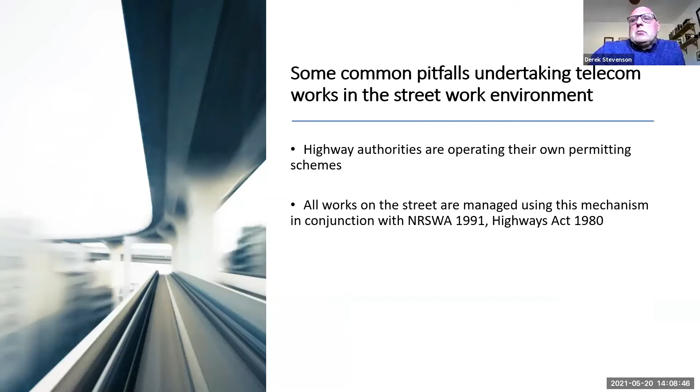Also contained in the Act is a provision for local highways agencies or local authorities to issue fixed penalty notices for failure to address issues contained within permits that are issued when doing works within the Streetworks environment. These are some examples of what an FPN notice looks like, and what they will issue them out to you for through the portal.

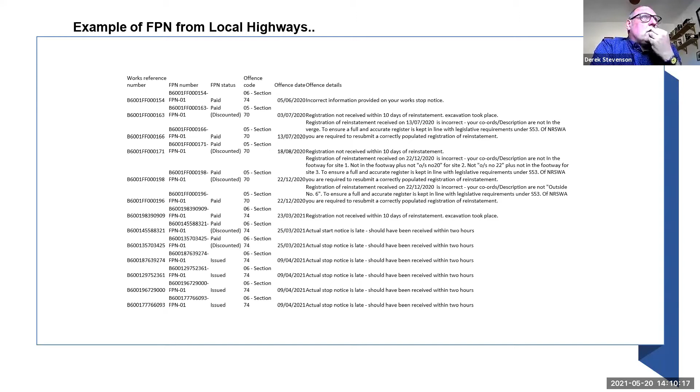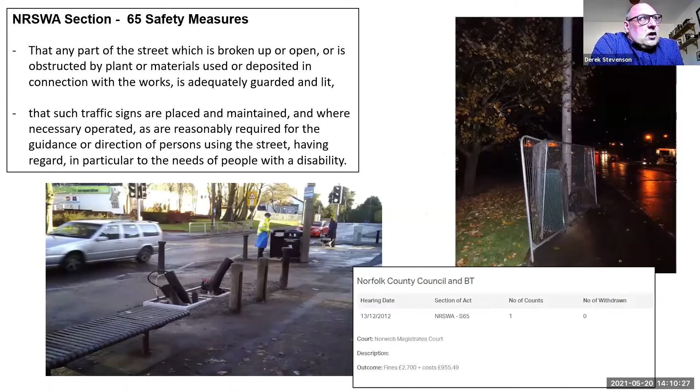The interesting thing about this is, under NRSWA, there's section 65, which they call safety measures. The two photos I show here were actually taken while we were doing live works delivering some telecom works. The first one, on the left hand side, shows a street cabinet that's going to be deployed at a later date. That would actually result in a section 65 notice and potential prosecution. That is an unsafe piece of apparatus that's been left, and it's creating a hazard towards the general public.

What you need to be thinking about when doing these works is if somebody who's impaired of sight was to come into contact with that piece of apparatus and suffer an injury, you would be liable not only under section 65 but also under liability issues as well. This is why local authorities, especially the highways agency and highways inspectors, get rather upset when they go out and check on permits and see situations like this occur.

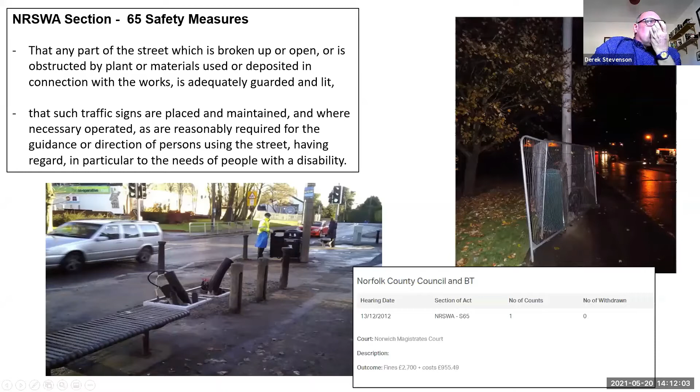The next common occurrence is unqualified staff working within the Streetworks. There is a provision within the legislation that says folk need to be qualified, and it details what that qualification is. As a minimum, most folk need a Unit 2, which is what they call a sign, lighting, and guarding piece. It details how to set up a set of traffic lights, but those within the industry potentially think it's not fit for purpose because we don't set up traffic lights all the time. However, what we do is set up streetworks, which will potentially be permitted and incur some type of footway closure and/or carriageway incursion.

Section 70 is also an interesting piece because it's what they call a duty to reinstate, but it goes further than that. Essentially, the local authority can issue a fixed penalty notice when your permit description isn't accurate enough. For example, saying works are in the verge when they're actually in the carriageway, or saying works are outside number 6 when they're actually at number 8 or 10. So you need to ensure your permit description is an actual reflection of where you're working.

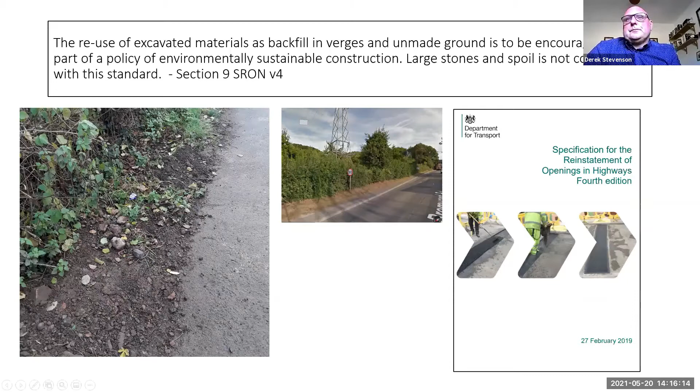Section 74 is the big one. Essentially, you have a permit for a period of time, and then you overstay that time period. The local authority will check whether you've overstayed, meaning your street works are still continuing after the permit date, or there's paraphernalia left—you've packed away and collapsed your site, but they will deem it as an occupation of the highway and an extension. This is where the fining system becomes astronomical.

There have been Section 74 fixed penalty notices of well over 60, 70, even £100,000 placed on civil utilities because signage was left on site at the location and folk simply forgot about it. So just be aware of that.

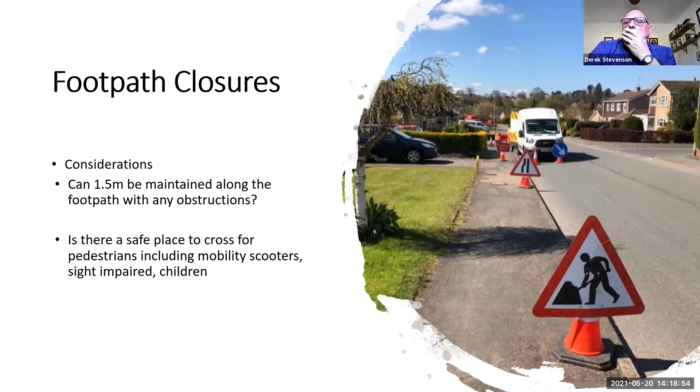Here's an example of site setup: a site was set up with the footpath closed off, expecting pedestrians to walk around, but there was an incident where a mobility scooter went onto the grass verge and toppled over. Consideration needs to be given to ensuring sufficient hoarding is put down to prevent a mobility scooter from toppling or presenting other hazards, like people tripping over. It may be better to consider moving the footpath over or completely covering this area instead.

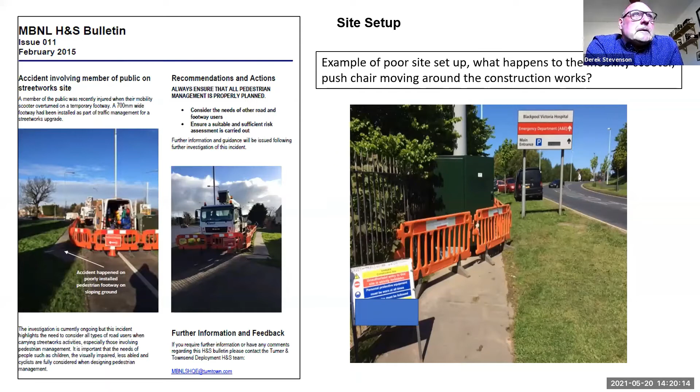Gate guarding. There's been some issues around this recently. Telecom operators had an unfortunate incident whereby a toddler entered a partially guarded chamber, and the toddler fell in. The actual operatives were at the next chamber, looking at how to essentially do the works they were planned to do.

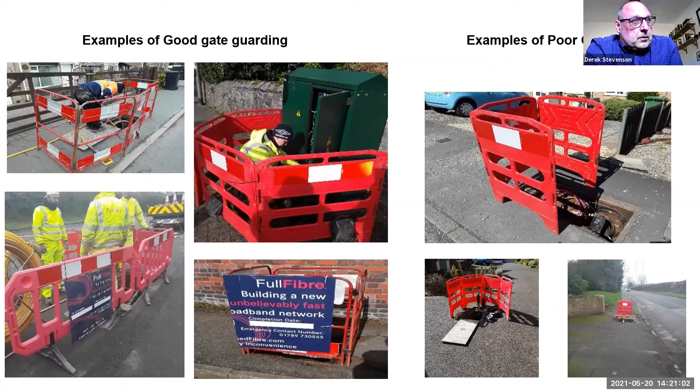This is probably a pretty easy win, in the sense that when guys are out working, the supervision piece is that they are actually leaving unattended chambers fully guarded. There's some good examples of gate guarding, and some pretty poor ones as well that I've clocked when I've been out and about on our estate.

Defects on existing telecom infrastructure - this is where yourselves can potentially report these in as an immediate defect. So this is one that was recorded: the chamber lids are going to essentially fail if one more of those pins break or fracture.

This was reported into the asset owner, and they've got a 2-hour SLA to respond, in which they did. We do need to have a facility to report these. As an asset owner on our network infrastructure, we need to have a mechanism so that members of the general public or other contractors can report failures on our network.

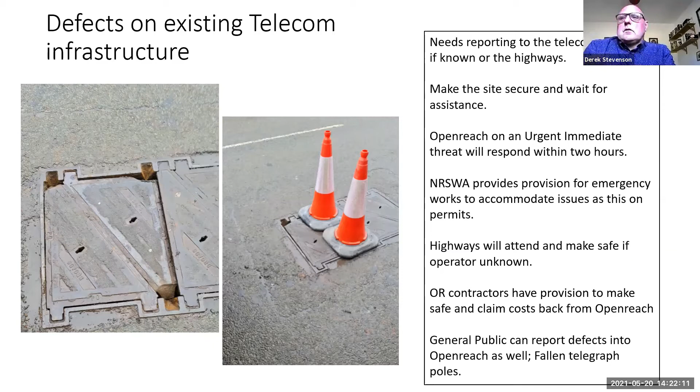Some examples: we've got an engineer who wants to do some fibre splicing out of the back of his van. However, the network doesn't facilitate that - the actual splicing activity takes part in the chamber. The issue is the operative hasn't moved his van, and he's now causing an obstruction on the footway. If the vehicle was moved, line of sight would be given for the pedestrians, so they could make an informed choice to cross the road when it was safe to do so.

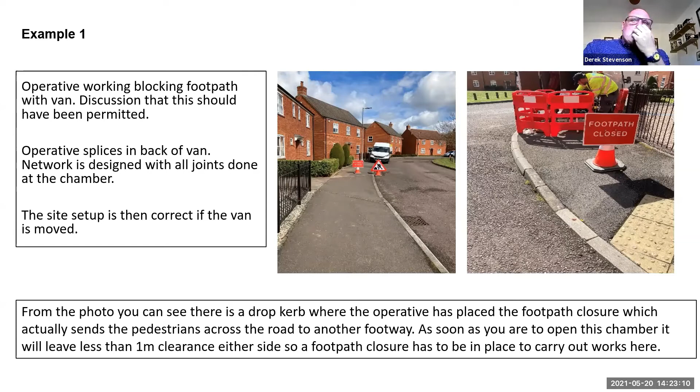Example 2, telecom site. The width here is good. However, the issue is that the rear of the telecom site is unguarded where the vehicle is. Pedestrians, or more often small children, can enter the work area. In this instance, there was opportunity for gate guarding to be put around the back of the work site, and I would implore you to make sure that your work sites are completely guarded.

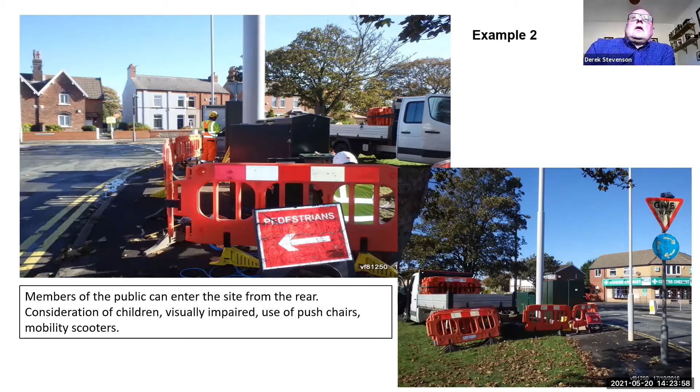Example 3 is probably a better one, where we've got some temporary lights in place. What's happened here is that pedestrians can enter the work site on the left hand side, where the streetwork barrier isn't fully across to the wall. The site setup was probably poor, because they should have put the pedestrians out into the road - there was sufficient width to do that. Instead they closed the footpath and expected people to cross over at that location, but there were a lot of parked cars on both sides of the road when they did so.

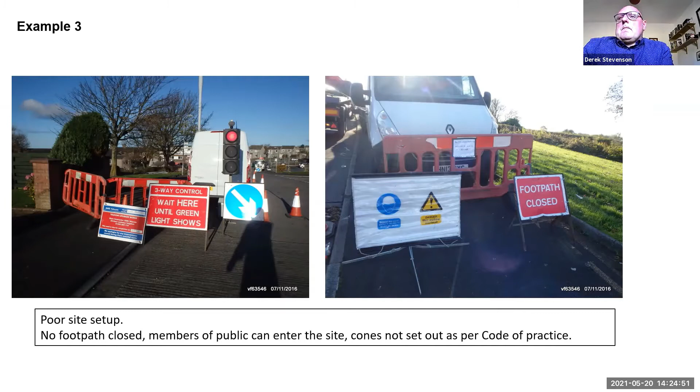Another example: we've got vehicles within the cordon. We don't necessarily know if those vehicles should be in that cordon when they've got the lift going on to put that telecom monopole in. The interesting piece is the pedestrian management is not clear here - it doesn't look clear if pedestrians are meant to walk down to that site or not. On the other side, the footpath is definitely occupied, with no footpath closure signage out. So essentially, this is a very poor setup.

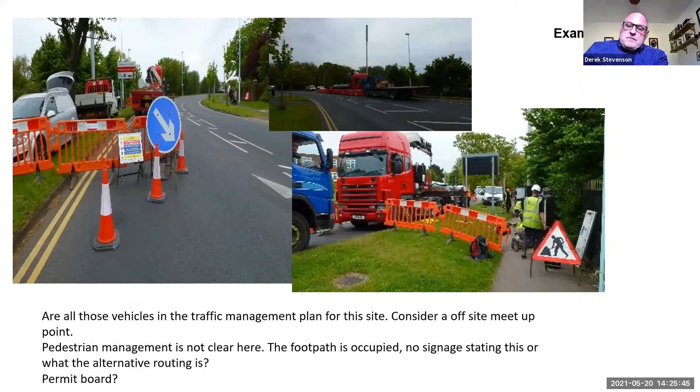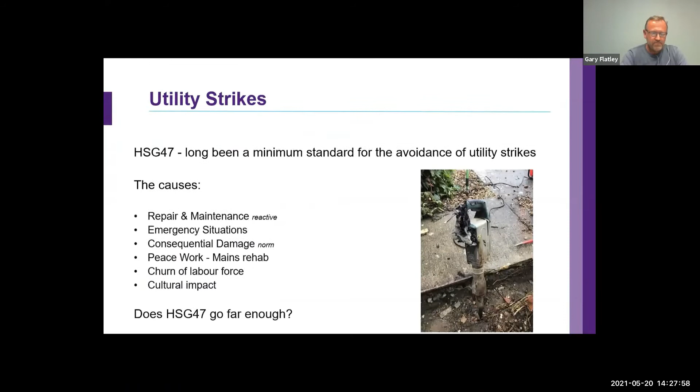So HSG 47 has popped up as a question. I've been having a bit of a conversation with one of the delegates, and it's long been a minimum standard for the avoidance of utility strikes, right back to the days when I was working out there, certainly on the repair and maintenance side, which is very much a reactive element of utilities.

One bugbear I used to have sitting in supply meetings was they'd hide behind this word emergency situation, and they would go full scale ahead, the 3CX pecking away, sometimes no plans on site, very little attention paid to CAT and Genny scanning, certainly no ground penetrating radar with the reactive nature of it. Again, like I said, they hid behind this word emergency.

I always said, if you had, let's say, a clean water supply off for 2 hours, not in my knowledge, I don't think anybody's actually died from dehydration. So anyway, you look into HSG 47, paragraph 71 to 75, certainly defines what an emergency situation is in utilities, and it's essentially where there's a risk to life or property, not necessarily just being off service for a couple of hours.

Certainly, again, in my experience, consequential damage from doing excavations just seemed to be the cultural norm. It was an accepted practice, and they would fully expect to get the insurance claims coming in thereafter, or the invoices from other operators.

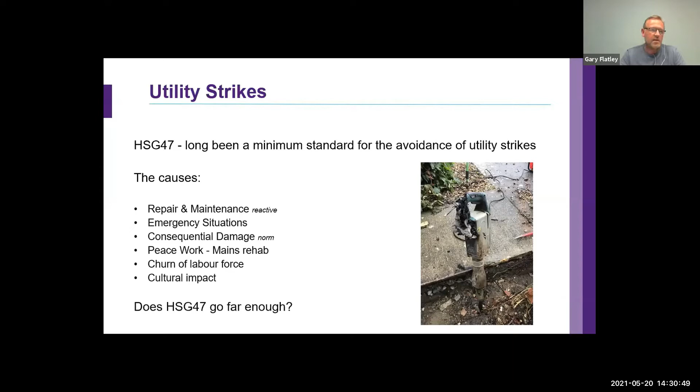So I was involved a while ago, going back to about 2008 to 2010, working with the Utility Strike Avoidance Group, and it was a volunteer committee that came together to see what we can actually do about reducing cable strikes, utility strikes. There's lots of information, and I'll share the link later, about why we are having these utility strikes after years and years of knowledge. We're still managing to hit other people's apparatus, and certainly there's an absence of safe plant.

I know there is an adoption of things like air picks, vacuum excavation, etc., but still it isn't ubiquitous across utility companies. We still do rely on the mini excavator and the grafter to get in there, so to speak.

Again, totally agree with one of our delegates, Paul. Plans are certainly not accurate. They're just a guide. They don't take into account for things like coil cables, meandering cables, pot-ended cables, that type of thing, or dead-end branches if we're talking about gas and water.

Certainly you wouldn't use ground penetrating radar on R&M, but for planned works, like mains rehabilitation, there's no reason why you couldn't use ground penetrating radar services to give you a better understanding of what's beneath the surface. I think there's just a general reliance on the CAT itself as well. We've all seen it, very rarely do you see the CAT and the Genny combined on site. It just seems to be swing the CAT around like a handbag and give it a go. There is some data coming up regarding these dial before you dig services, and certainly they can have an impact on reducing your cable strikes.

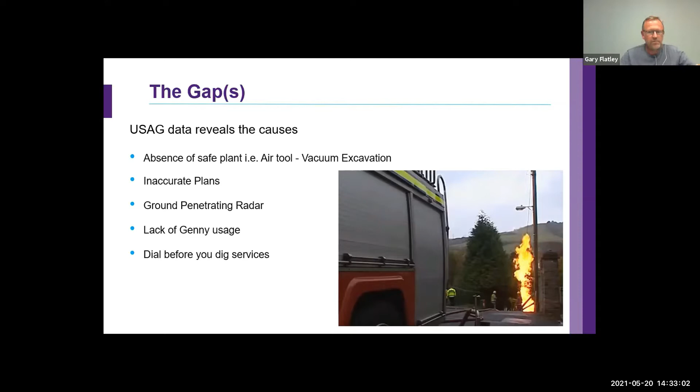Again, this is all USAG data, so there's an estimated 1.5 million kilometres of utility running around the UK. And again, based on opening notices, approximately 12,000 new streetworks are started each day.

Now, the 2,500 strikes are all from USAG delegate volunteers who've signed up to the charter. It's all data that they've provided, but I'll come on to a powerful slide later which just shows you how strong this committee is. And in 2019, like I said, there was 2,500 strikes in that year.

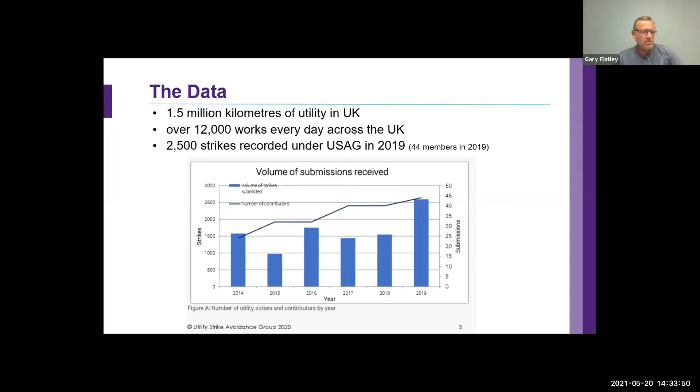This next slide, interestingly enough, 4/5 of all utility strikes occur in either the footway or the carriageway. And certainly when you look at the footway, it's more than half of all utility strikes. That's a huge proportion.

Okay, so NJUG 7, the diagram, the illustrious diagram that we all follow, don't we? Identifies how we should be laying utilities within a footway or a carriageway. But I think we're all not naive enough to understand that it is a guide. It's not an accurate science, again a bit like HSG 47. Does it go deep enough? Probably not.

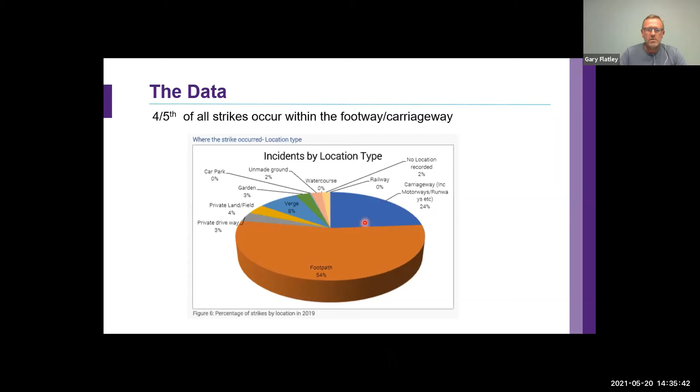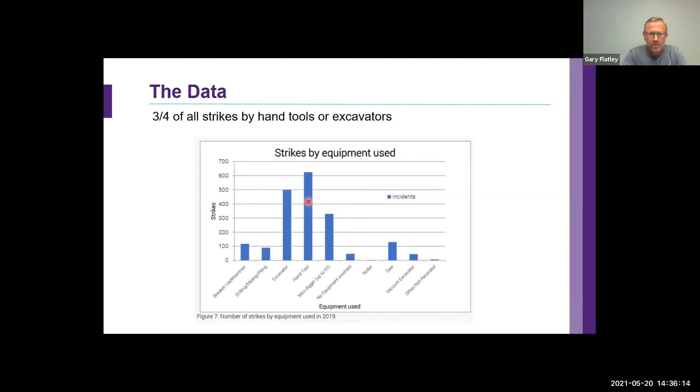And I think the last slide is more powerful than the previous one, because there's just two things that really stand out in terms of strikes, and that's either hand tools or the good old grafter. Dare I say it, some guys have still got wrecking bars out there, or an excavator, a mini excavator, 3CX, etc. So 3/4 of all strikes are by those two pieces of equipment, the good old shovel or an excavator.

So what did we decide to do as a volunteer group? We used to meet quarterly. There was a little trip down to the Energy Networks Association, who very kindly hosted all the meetings and still do. And so for about 3 years, we discussed what we were going to do.

We canvassed a lot of the main utility companies out there. We canvassed a lot of the associations, the asset owners. The HSE had a seat at the table, and were also giving their opinion on what could be done. But essentially in 2012, April 2012, the Transport Minister at the time, Mr. Norman Baker MP, launched this charter, the Safe Digging Charter, for all the utilities to adopt and agree to sign up to.

We went a bit further, and when I said does HSG 47 go deep enough, we looked at what else we could offer out there, not just for small and medium enterprises, but best practice that your larger enterprises could actually adopt.

There is some real good guidance on that website, again all free of charge, and it is there for anybody to use. We also lobbied these industries and asked them, could they just do one opening notice and get two or three jobs done in that period of time, and it seemed to work for a while.

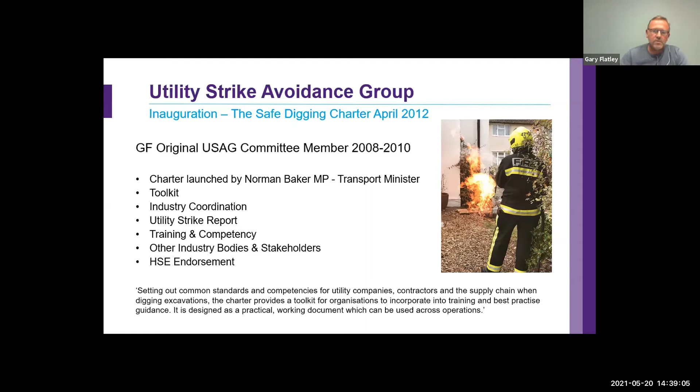Moving on to the toolkit, what's it about? There's a lot of information in there. You can either use it as best practice if you've already got established management systems, or you could pull the whole thing off, rebadge it as yourself if you're a small contractor, and all of a sudden you've got a management system ready to go.

So in the design and planning stages, it's a series of flow charts which you can put to practice. The responsibilities, again, there's a checklist in there, but it's basically a flow chart process. It talks about underground avoidance training, and again, there's a best practice document within there.

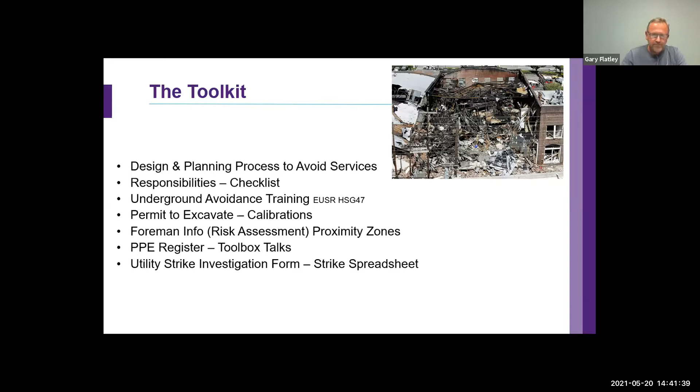I'm not really going to go into any depth further on this slide, but the toolkit does also offer up other information like strike damage reports, the safety charter, which is there for any utility company to sign up to, whatever size you are, small, medium, large enterprise.

There's a hell of a lot of historical safety alerts on there, looking at root causes and how to avoid them moving forwards. A very large library of free video information on everything from safe use of Cat and Genny to safety at Streetworks, that type of thing. And a hell of a lot of reference guides such as HSG 47 and PAS 128, those type of documents.

So again, I think Sam at the start said this will be available on the website, but if you want to make a note of where I'm trying to steer you towards, it's www.utilitystrikeavoidancegroup.org, and it'll open up the page and you can have a look around that and see for yourself.

I'm not on commission, by the way.

This is my penultimate slide, really, and when we're talking about things like electricity strikes, water strikes, telecommunication strikes, gas strikes, they'll all have their own different ways how they can be catastrophic, but certainly you can appreciate this picture is quite a powerful picture of a gas strike.

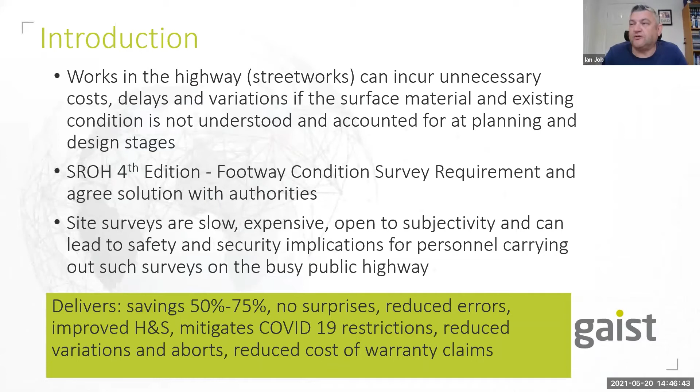So any works in the highway or street works can incur unnecessary costs, delays and variations if the surface material and existing specification, existing condition is not understood and accounted for at design stages. So effectively we're offering a solution to plan works more effectively in greater detail and at reduced cost. The recent edition of the SROH, the 4th edition, has a requirement in there for undertakers to assess the existing condition of footways and to agree, where they're in poor condition, with local authorities what the solution is to remedy that. And we're working with a number of undertakers and councils to bring some cost savings there, which I can elaborate on a little bit later.

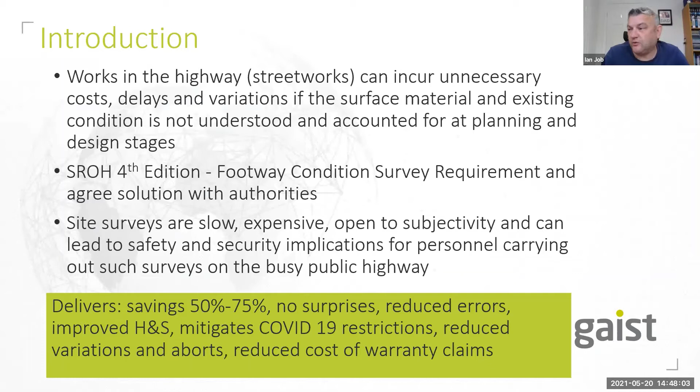Capturing that data through site surveys is slow, expensive, open to subjectivity, and more importantly for this forum, can lead to safety implications of surveyors walking the public highway, both security and the like, to the personnel carrying out the surveys and the general public. So what we're proposing and delivering to the sector is up to a 75% reduction in the need for walking surveys, reducing surprises when you're on site, both from an operational and commercial standpoint, and improving health and safety along the way. Not least during recent times, we've been able to bring to clients mitigation of COVID-19 restrictions through remote working and virtual walkthroughs, which I will show as we go through. So that's setting the scene really.

So just to explain a little bit about what we do using this graphic, it's an oversimplified version of what we actually do, but effectively, through our vision pillars of service here, we drive entire highway networks up and down every street, capturing high definition imagery every 900mm from multiple views that we stitch together in the form of video.

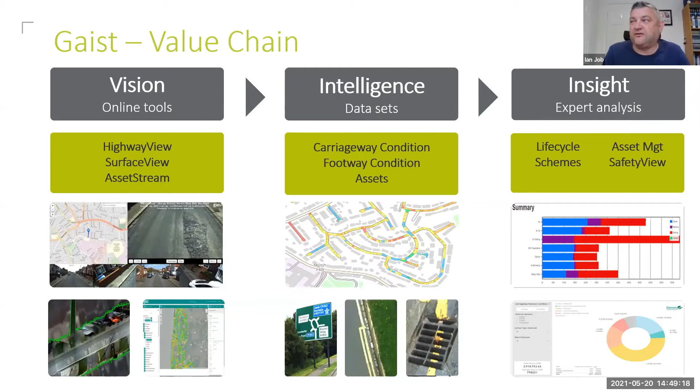Through processes of artificial intelligence, machine learning and some human inspection, we extract data sets from that imagery for use by mainly local authorities, the highway teams in local authorities, but also utility and telecoms clients. As a third pillar to our services, we also take our data and provide life cycle modelling plans, mainly for the local authority sector. So that's effectively what we do: capturing imagery of the entire roadscape at a moment in time in great detail that we can refer to again and again as required, say to extract data sets or for use in live projects.

At planning and high level design stages, you can assess the optimal route, improve cost forecasting, and have a more accurate business case, all without the need for visiting site. Then at detailed design stage, you've got more usable information, again without the need for site surveys. You have entire route data, every square metre of the working environment, not just sample patches, and as a consequence you get a far more detailed scope of works and bill of quantities.

We extract that data from imagery, but operations and safety teams can have access to that imagery almost as a free value add throughout the life of the project. This is for things like desktop reviews of safety, special engineering difficulties, traffic management requirements, and more information included in RAMS and CDM 2015 documentation, and then after the works are done, for management and verification of warranty claims. So that's where the safety element comes into it, as well as a free value add of the data we provide.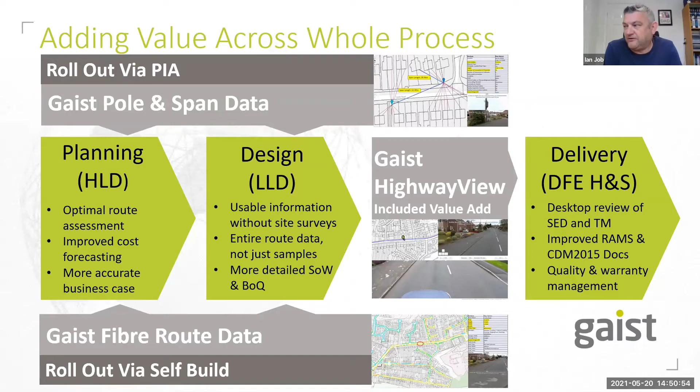So what does that look like? These are screenshots really - the data is actually alive and dynamic, and specific to each location. It's a GIS-based system, but this is just a screenshot of what it actually looks like, just to give you a perspective.

So this is the pole data. We can capture through our surveys far more detail, a volume of detail, an accuracy of detail than is available from walk surveys. So we capture more information than is available, without the cost of it.

Things like the heights of the poles, location, condition, ground conditions - but we're also able to capture the spans, either pole to pole or pole to property, by triangulating the imagery, so we can determine span lengths. Again, this is information not available from a physical survey, so not only are you getting more information, you're saving the cost, time and safety implications of a walk survey on the street.

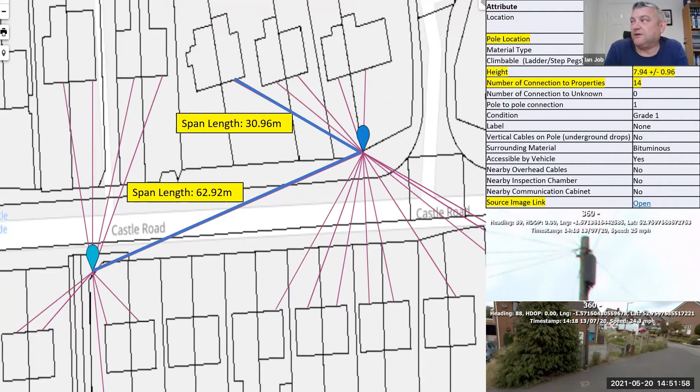Probably more relevant to this group is the route plan data we provide. This is similar to the information we provide to local authorities - we work with about 60 or so highway authorities in the UK, providing their annual inspections for road and footway condition, for their maintenance plans and safety inspections, etc. But this is the kind of data we provide to fibre operators.

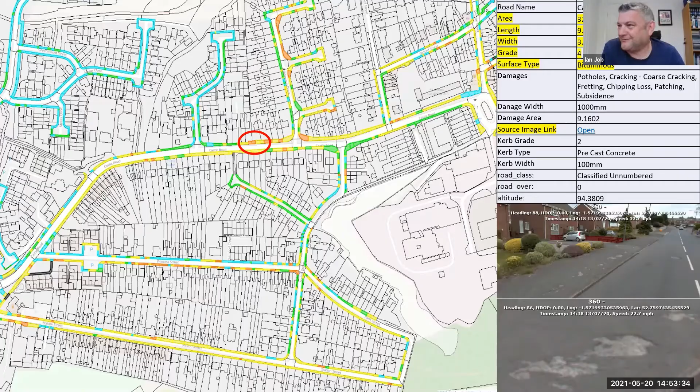So yeah, allocating resources in the right way. If anybody can recognise where this is, it's Swadlincote in Derbyshire, or the streets they're on. As I said previously, with all of our data, you've got a link back to the source imagery, so you can check out the environment, traffic management requirements, quality, and the working environment without needing to leave your office. The quality of the imagery is 900 times better than Google Earth.

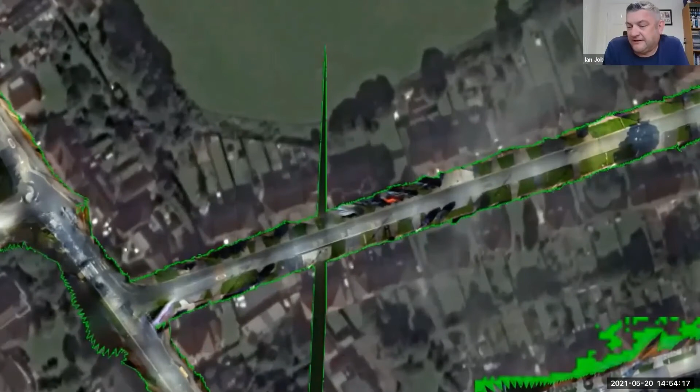This is a snapshot of what it looks like. If anybody recognises this, it's York. Anything outside of the green is Google Earth, which we use as a kind of platform. Everything inside the green is our imagery captured from the vehicles. As it zooms in, you'll see the level of resolution that's achievable, again from the desktop without having to leave your office.

There's a bit more to that, but I'll move on. As a case study, talking about reducing surveys, this is a project we did for one of the major fibre rollout operators. They initially tried our services in a small project in Dewsbury, where we provided data for a small section of 4 kilometres of network covering 451 homes.

The use of our data and imagery demonstrated that they could reduce 6 man days from the walkout process and the ECI process. So not only a cost and time saving, there's a safety element too, saving the safety implications of sending guys to site.

The consequence is a more detailed scope of works and bill of quantities, therefore minimising potential for variations and aborts. And to re-emphasise, all of the data comes with access to the supporting imagery, and as an example, because we do it bespoke to a client's requirements, it's all bang up to date and current.

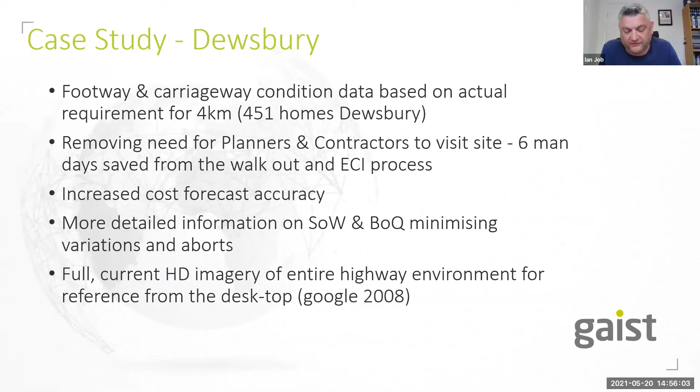The Google Street View imagery for that particular area was more than 12 years old, and a lot of things can happen within 12 years. That's just an example.

This is an example of how it was overlaid into their CAD drawings. Not only did they have the physical route data on site, the red line drawing of where the fibre is to go, we could overlay a layer into the CAD drawing or through a GIS platform showing footway condition, surface material, and other issues that can be interrogated.

And again on the safety side, access to HD images for every polygon, either as an individual image or a video stream, means you can do a virtual walkthrough with contractors remotely from the desktop.

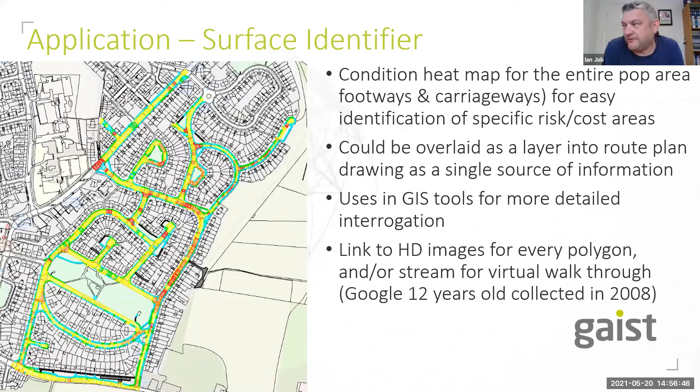So just a quick summary of the benefits, particularly in relation to safety. We can negate the need for traditional walk survey methods, and we've proved we can reduce them by up to 75% in most cases. For risk assessments and construction phase health and safety plans, we're covering every square metre with far more detail than is available from a manual survey.

So these documents contain more detail with greater accuracy. The more information provided in safety documentation, the less likely there's going to be incidents on site. An example of that: I'm aware of a contractor that went to change a telegraph pole.

The information on the pole was wrong, as given to him by the customer and their team. They thought it was on a footway, but when they got there it was actually in a field, they used the wrong equipment, and there was an accident where the pole fell over. So having incorrect information on the working environment can lead to problems.

Again, to re-emphasise, use of the data has been invaluable to a number of clients during the pandemic, where we've all been stuck at home in lockdown with travel restrictions. Projects were able to be executed by using the remote data and access to the supporting imagery.

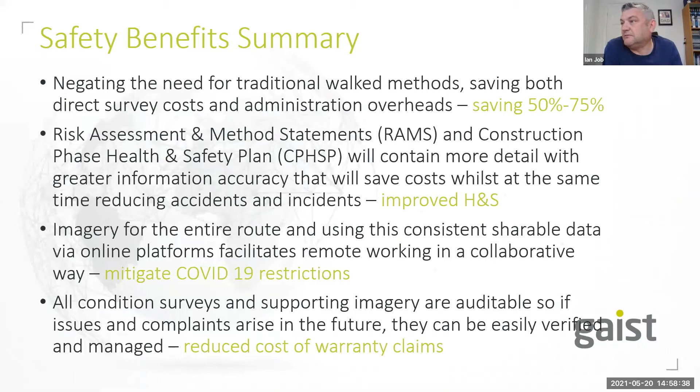We work for about 60 or so local authorities every year. We drive something like 200,000 kilometres of highway network every year. We work for a number of private organisations, like CityFibre, Virgin, Gigaclear and others. We also do work for the Department for Transport, including an assessment of the quality of white lines, getting ready for autonomous vehicles and the like.

So this is not a theory. This technology is being used already, and clients are seeing the benefits of it.

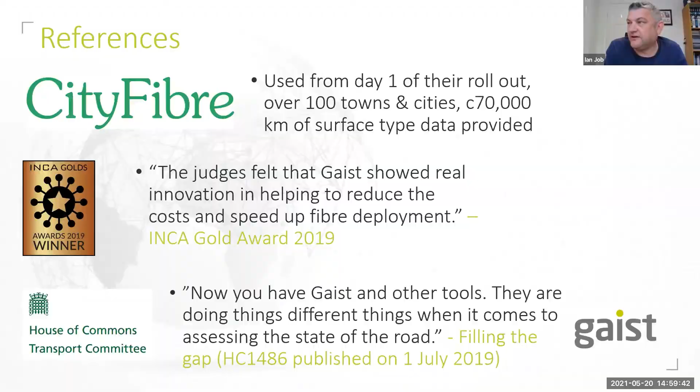Thank you, Ian, and thanks to all of our speakers. That's been really informative today. I don't know if anybody's got any questions they want to ask. I know Paul has mentioned he'd like to speak about utilities in the footpath.

My company is a utilities infrastructure provider, and we put gas, electric and water in the ground. Often when we're excavating, the stat plans are incorrect. We do trial holes, we do cat and genny, we've got all the situation organised, and still we'll damage some utilities. It's very annoying from our point of view, and when you go back to the networks, they hide behind HSG 47, which is frustrating.

Initially they're not laid properly, and they're not marked up properly - there's no marker tape, there's nothing there. We often find street light cables run all over the place, zigzag up pavements, and are coiled up, often only 50mm below ground surface. It's an absolute nightmare for us.